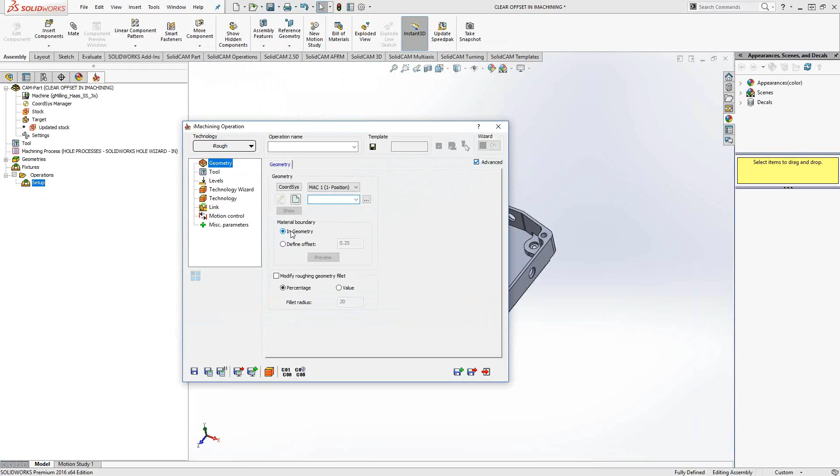So I'll just set up a quick 2D iMachining right here. So add milling operation, 2D iMachining. And normally by default, we have this option here under material boundary called in geometry, meaning that if we have a closed chain, it defines it as a complete pocket. But most people skim over this because they don't even think about using the clear offset method in 2D iMachining. So that's what I'm about to show you.

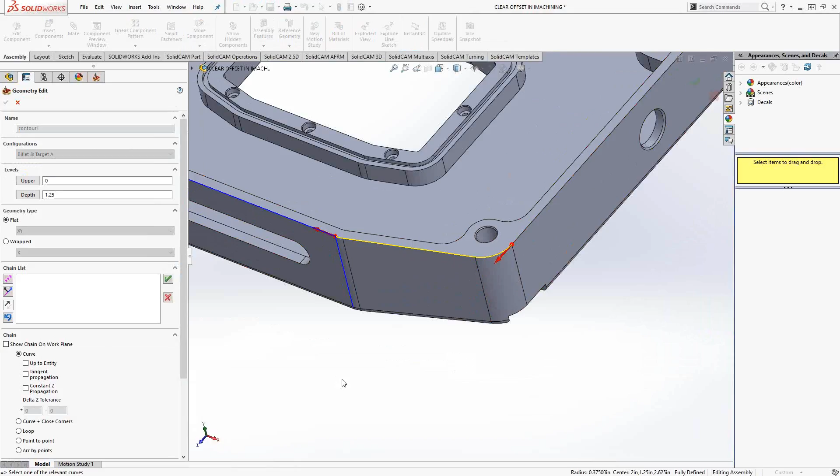So if I go to my part, and let's say I just want to finish this edge right here. Let's just choose all this geometry right here, assuming that these two flush edges come to a point, and we just need to trim that corner there. As you see, this is an open geometry, so it's not a closed pocket. So as soon as I click OK to accept this geometry, 2D iMachining defaults to that defined offset, and that essentially is your clear offset. It's adding about 1/4 inch material off of that contour, so that's just a parallel offset.

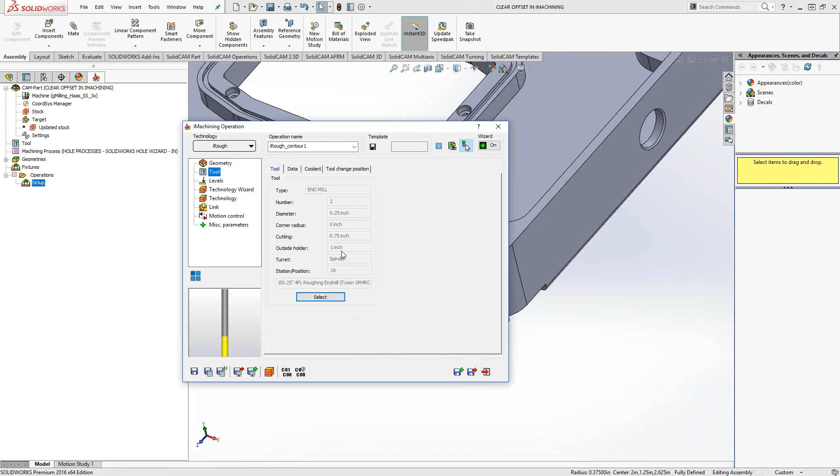The rest of this programs the same way you would a regular 2D iMachining. It's just now it'll operate almost like a clear offset in parallel. So I'll just continue to go through this and set up my levels like I normally would with a 2D iMachining. Put this up to level 8. And technology, I'll leave the 5 thou on the walls and the floor. So everything is programmed exactly the same, except this is not a pocket.

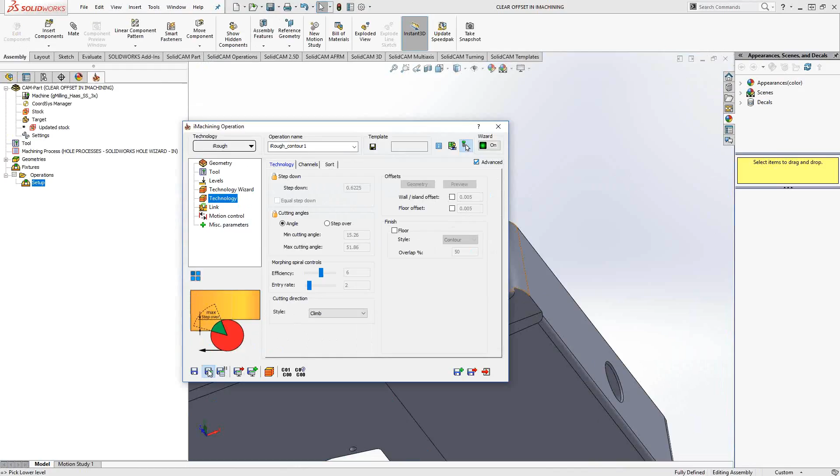So when I generate the toolpath, it now operates like a clear offset in a parallel. So that 1/4 inch material, it did its usual iMachining style step over and back and forth. It is now retracting back and forth because, again, it's not a complete pocket, but it is still using the iMachining algorithm to do a clear offset method.

This is only for open chains. So if you make the mistake of an open chain and you meant to do a closed pocket, this is usually the indicator that the chain is incorrect. If you're looking to do the clear offset method, then the only option you'll have with an open chain is this one here.